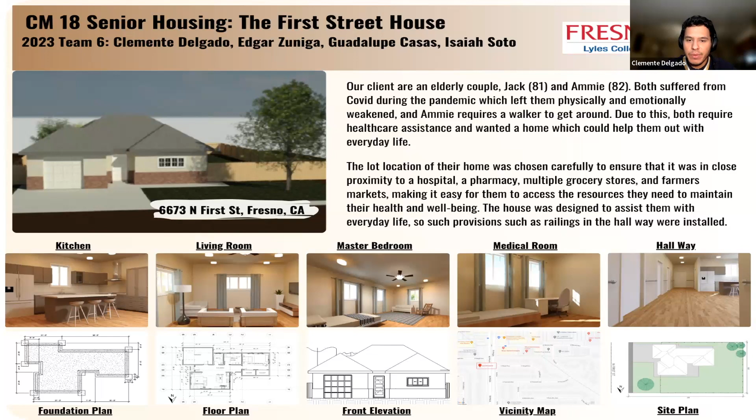In our poster, we have a kitchen, living room, master bedroom, medical room, and hallway exhibit. We can also see the foundation plan, floor plan, and front elevation, as well as the vicinity map and the actual site plan for the build. Hope you guys enjoy our presentation.

Now we're going to go to our design concept. The project location, as Clemente said, was chosen for a reason. As you can see in that right middle section, right off First Street, we have 6673 North First Street, Fresno, California. This is our house area.

It's right out North Fresno, so pretty safe, at least in my eyes.

For our design concept, we were given two projects to choose from, and we chose the single dwelling house for a senior couple of ages 65 and up. The floor plan is about 1,500 square feet, and it includes a living room, a bedroom, kitchen, and bathroom.

The story we created for our senior couple is that they are an elderly couple, around 80 years old, Jack 81 and Ammie 82. They are disabled. Ammie uses a walker and they both had COVID-19 during the pandemic, so they need healthcare assistance at all times.

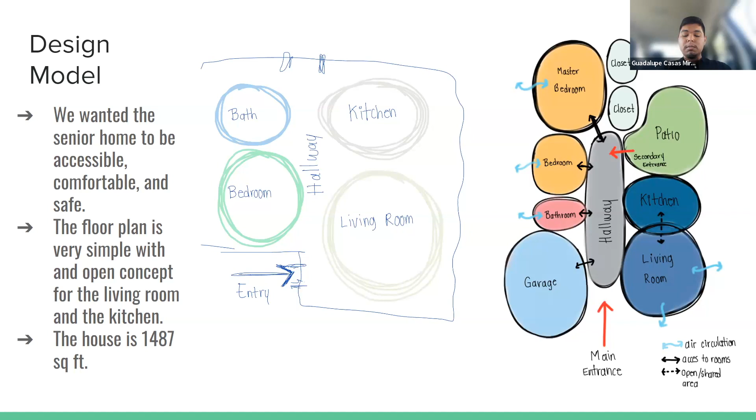So we started with a simple sketch of a bubble diagram to arrange the spaces we had, and we took it and did another bubble diagram, but with the specific areas we wanted to include, for example the master bedroom and the medical bedroom, and also the garage and closets.

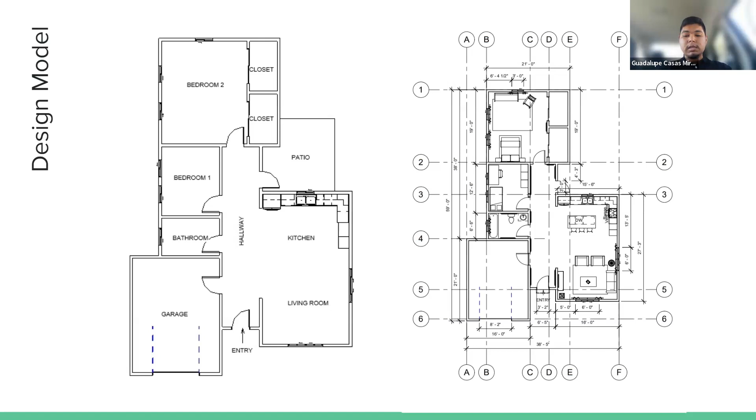Our house is about 1,487 square feet, and we took our sketches into Revit to design the floor plan. On the left, you have our initial floor plan layout, and on the right, you have the floor plan finished with furniture placed and dimensions to guide and show the square footage of the area.

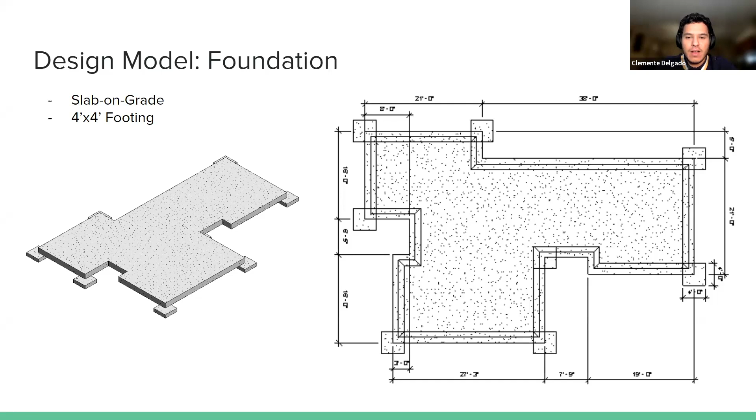Our foundation is basically slab on grade with 4 by 4 feet footings just for extra support. I can say this was a bit overdone, but safety is a good aspect in building, so we decided to build upon this design. You can also see our lengths and measurements there.

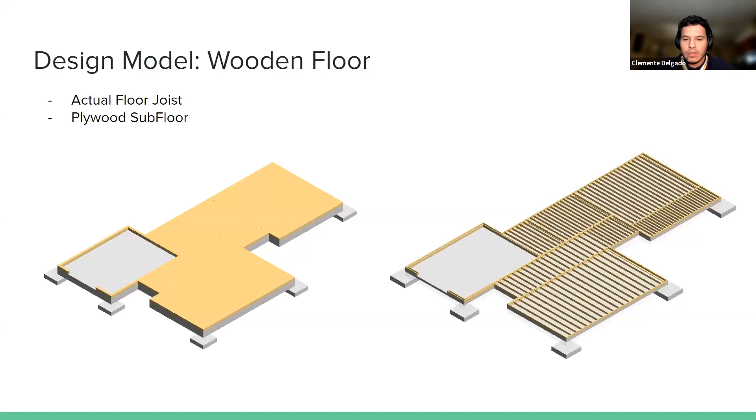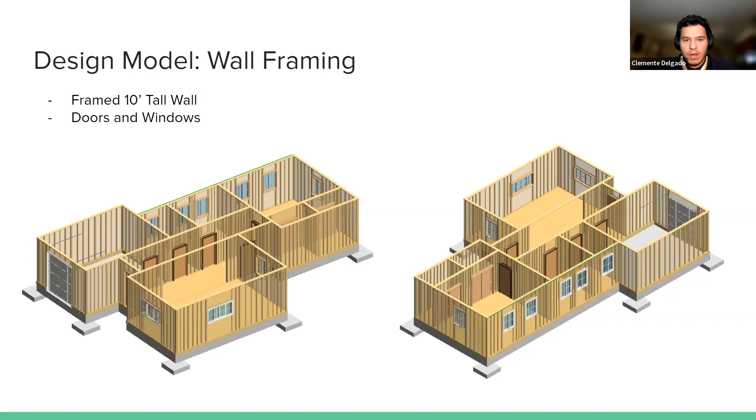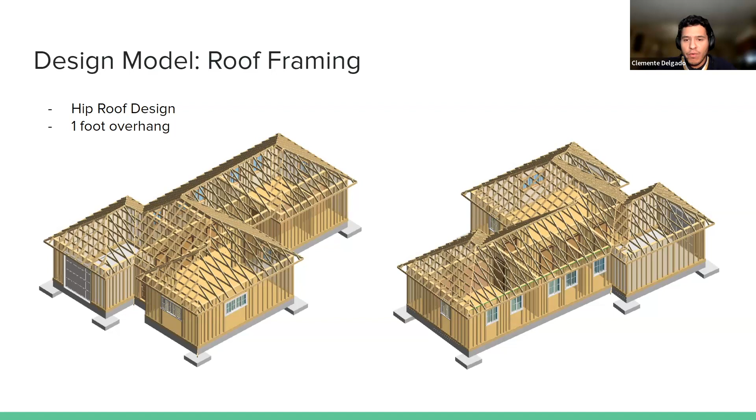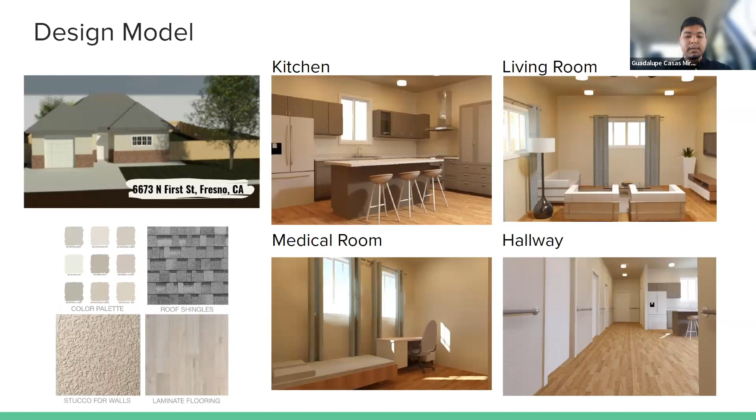So now we're going to get into the meat of the financial side of things: the construction costs, our estimates, and pretty much our bill of materials, everything that we used, and unit prices.

So in summary, the total cost of the house to build is going to be around $324,000, with a markup of $405,000. This is right where we wanted to be, because most of the houses in this neighborhood are around that same price point, so we wanted to match that so we weren't too under or too over. That was our budget.

You can see I have total working days of 142 days. So it's a little faster than normal, right? Typically it's 180 days.

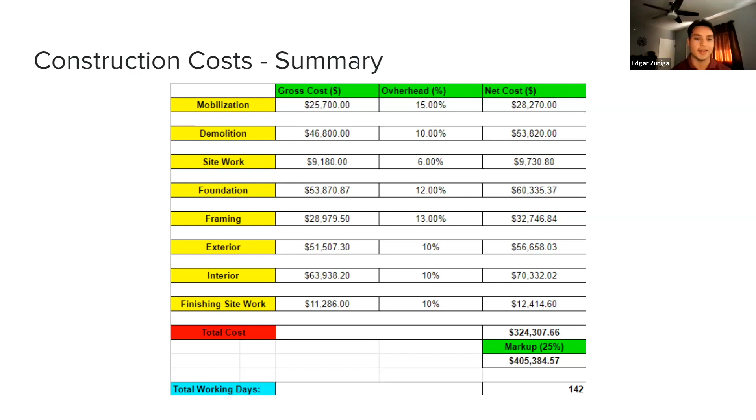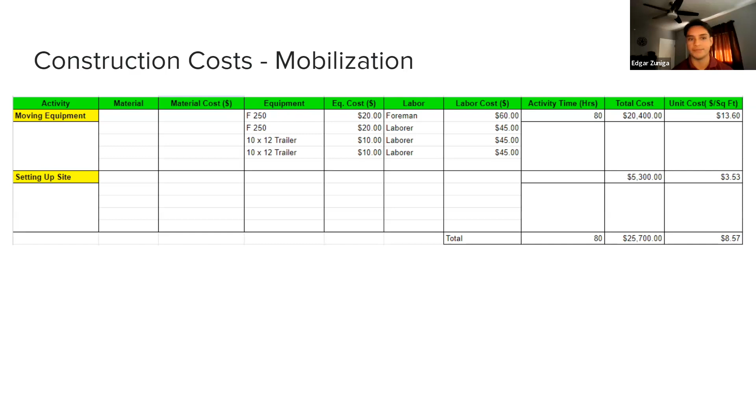So this first sheet is going to be mobilization, pretty much moving all our graders, our dozers, getting the site ready, getting all our equipment ready. That's what this cost includes. The total was $25,000 with an 80-hour, or 2-week, setup time for mobilization.

Then demo. So our demolition cost is $46,000 without the markup, without overhead, just net, and we have a little bit over 2 weeks for this activity. That includes destroying the old house and ripping out the old foundation. That was one of our questions as the construction cost crew, we were debating whether we should rip out or reuse the existing foundation. We decided to rip it out and put a new one in, since we don't know the existing foundation's health.

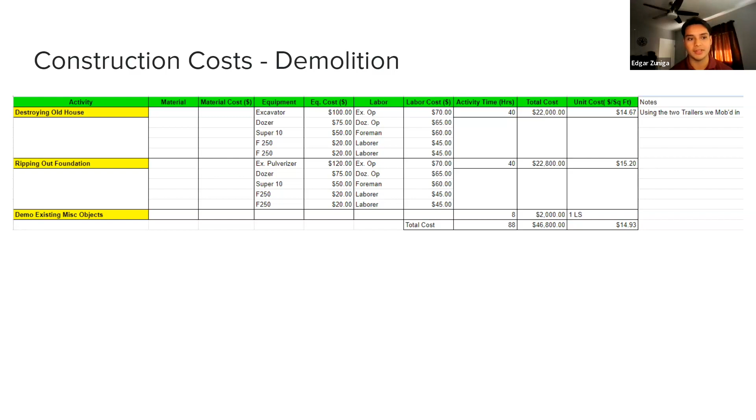Grading, obviously getting the whole site level so that our crews can be filling in right, making sure nothing's sloped, making sure everything's compliant, and other miscellaneous site work, like getting garbage out of the way. This has a week allotted to it, which is a little more than needed, but you got to give them time for safety. So $9,000 for this one.

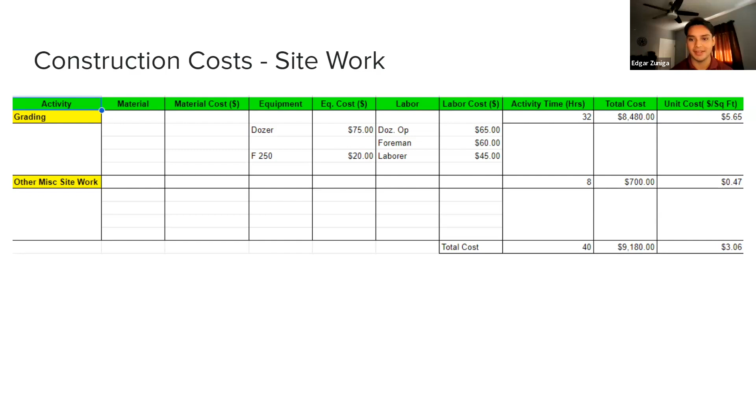Our foundation, which is one of our bigger items - we have filling our hole with AB so we can put our concrete over, grading the AB to get it flat, and compacting it to make sure we can strengthen the concrete on top of it. Then we lay fabric, which covers the AB, then our formwork so we can get the perfect shape to fill in the concrete, then our rebar guys go in, and the last thing is pouring slabs and footings.

Our total footing, or total slab with the footings, was going to be around 40 yards - 45 yards. So yeah.

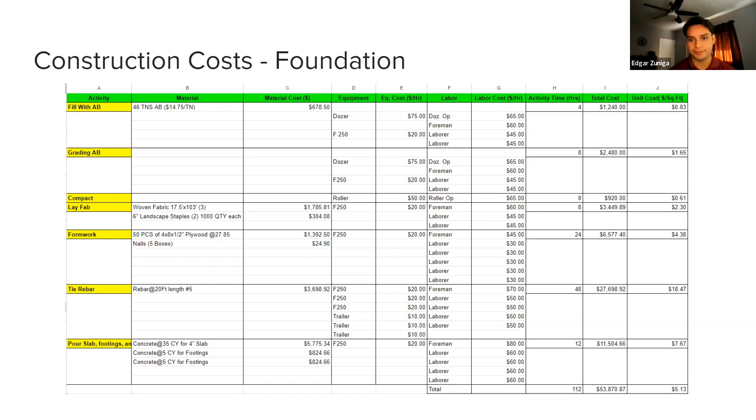Now we have our framing, which is pretty much bare bones framing, and then our roof. Our roof does cost more than framing, which is pretty typical in my opinion. We also included an HVAC system that's going to be placed at the same time as the roof, or sequentially placed.

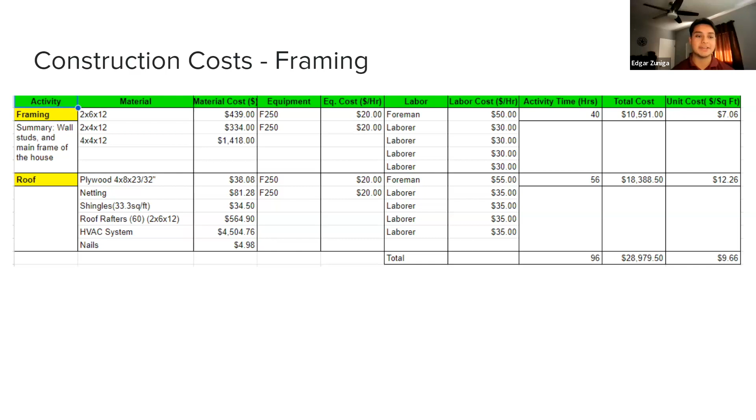Then we have our exterior. This is most of our closing off the house, taping it, sealing it from the outside, and then putting up our windows, our stucco, adding the brick veneer after the stucco, and some finishing items like installing garage doors and regular doors.

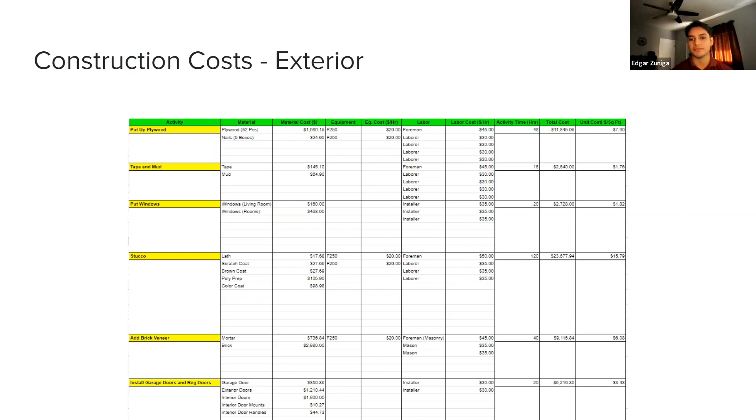Then we have interior. We have a quote for an MEP sub to come in and do all of our mechanical, electrical, and plumbing - that's all subbed out. We have a total cost of close to $4,500, with a 2-week time allotted to that subcontractor.

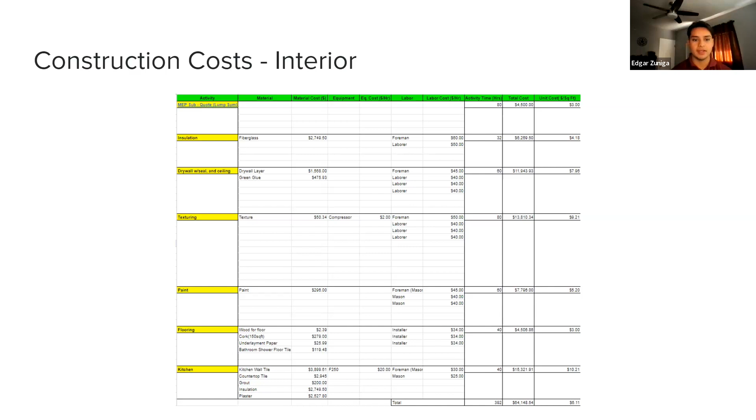Then we have our insulation, drywall with sealing right after, and then texturing the wall so it can be painted nice and finished. And then our paint, our flooring, and kitchen - that cost is going to be $64,000.

Then some of our finishing items are our landscape costs. That was quoted off - I have a link to the subcontractor that's going to give that to us. He's just going to finish the site off, plant our trees, all that type of stuff.

Then we have interior finishing - anything that needs to be touched up, crown molding that needs to be trimmed, all that type of stuff is done right here. And then we have our finished exterior, which is making sure the outside is nice and finished, no spillovers, anything that needs to be fixed is fixed.

And then we have our cleanup site - cleaning up garbage, cleaning up site, taking out porta potties, temporary utilities, all that stuff is going to get ripped out. So that's what that is for, and that's 11 grand, or $11,286.

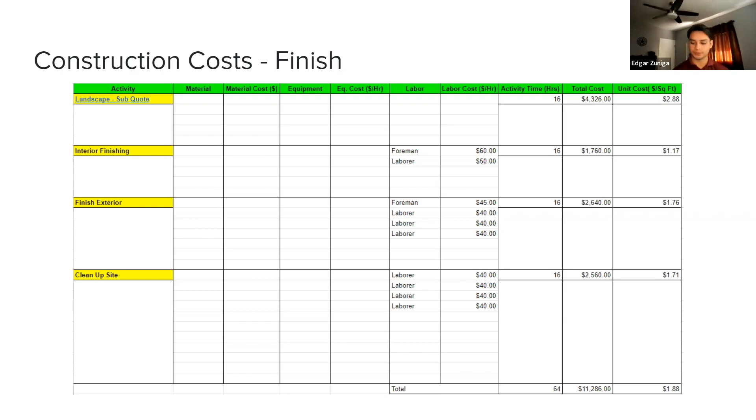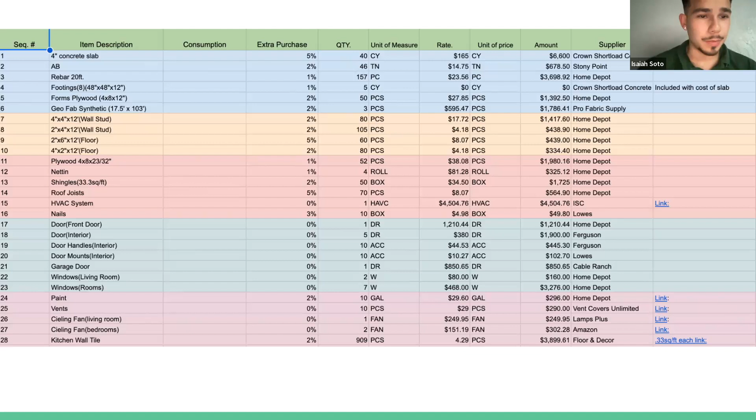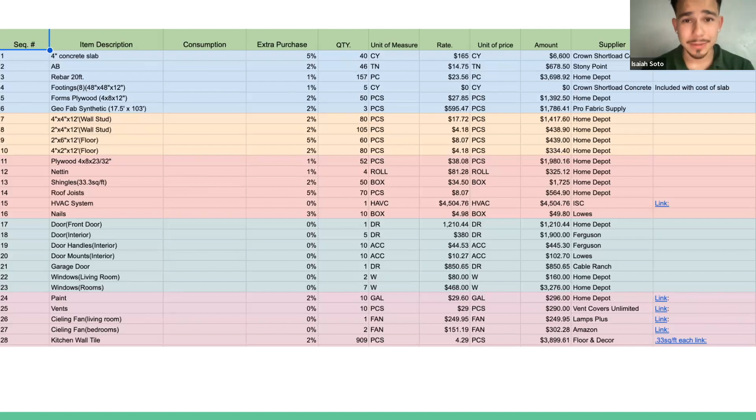And this is the bill of material sheet that I made right here. What I did was color code everything based on what it's for - blue being our concrete slab, orange being our wall and floor studs, red being our roof, turquoise being our entryways, doors, garage door, and the last one is our interior, which is the most expensive category if you look at the bill of materials and Edgar's cost sheet.